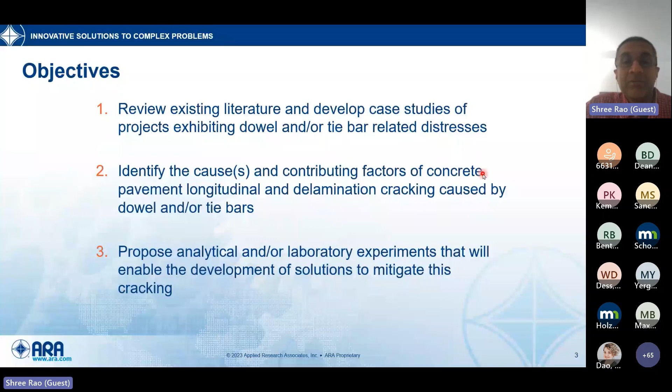This phase one of the project is really focused on some field evaluation and the background information necessary for phase two, which would be the analytical and laboratory experiments. That part is not covered in phase one, but would potentially be a phase two topic, eventually funded by NRRA.

As I mentioned, there are different tasks under this. We did a thorough literature review, picked some case studies, and in task two did field investigations, putting together a field investigation report and presentation. Task 8 is this Research Pays Off webinar we're doing right now. We're wrapping up a memo for the analytical and lab experiments that could be done in phase two, and we'll also put together a final report combining the information collected in all these different tasks. Those should all be coming in the next few months and posted eventually.

I'd like to acknowledge the panel for providing us some of the site locations. I won't spend a whole lot of time here, but we limited ourselves to 6 sites, many in Wisconsin, but also including the Illinois Tollway and Minnesota. One thing I'd like to point out is these are not necessarily thin pavements - they're 10, 12-inch pavements with differing slab widths and different types of shoulders. But I do want to point out these are relatively low age pavements. This cracking we investigated in this project was on pavements built not that long ago, and that's part of the big surprise of this type of cracking we're evaluating.

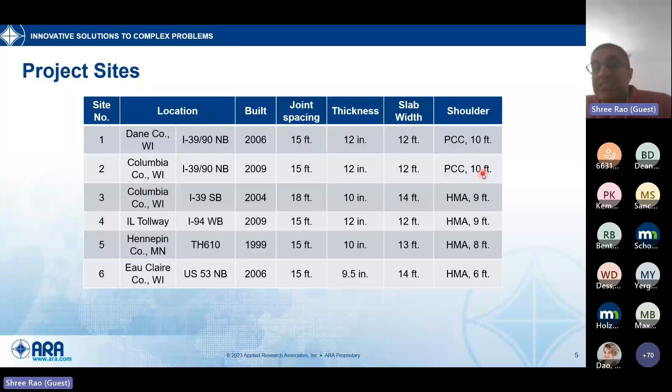So the next 6 slides, I just want to give some feel for this type of cracking that we investigated in this project. I'm going to go through these slides relatively quickly to show the surface distress of this cracking.

This particular one is on I-39 northbound in Dane County, Wisconsin, and you can see these cracks are pretty large cracks. At least from my experience looking at concrete pavements in the past, sometimes when we see a joint distress, we pretty much automatically think one of two things: dowel alignment, or durability issues because of moisture getting into the joints. But this looks a little different than some of those.

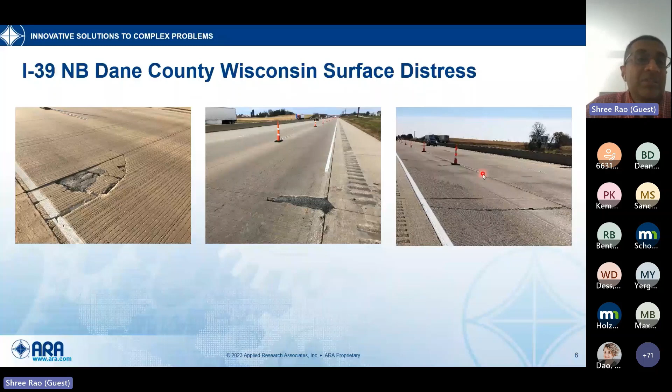So if you can see, these are kind of largish cracks, and some of them are more like transverse cracks that are close to the joint, and some of them are large spalls. As you can see, some of these have been filled with asphalt.

This one is in Columbia County. Again, there's kind of a pattern to these cracks. Eventually you start seeing the spalls, and the depth of these cracks is another important thing. Some of these are not super deep, they're about half the thickness of the slab typically, and some of that will become a little bit more obvious as I go through the presentation.

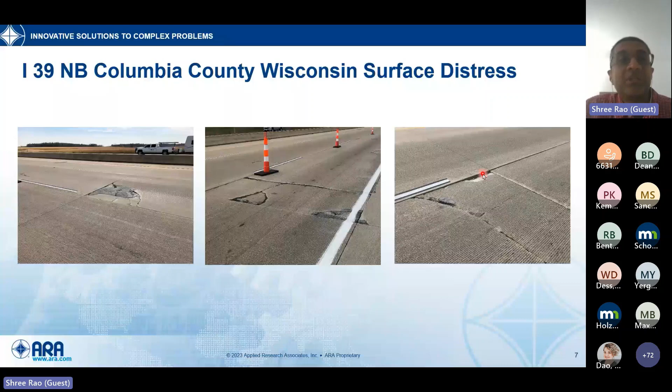The third one, this one is on I-39 southbound Columbia County, and you can see again, there's this typical pattern of cracking that is near a joint or something like this. And then the cracks might spread into wider areas, but this is kind of typical of this cracking.

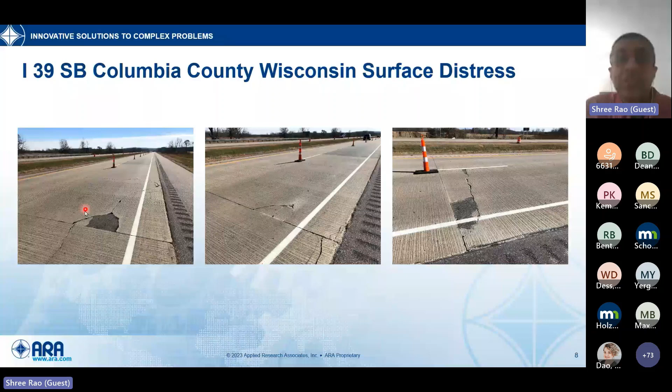This one was from the Illinois Tollway, and this, of course, is from a vehicle-mounted camera that you can see this distress. Again, this is right at the leave side of this joint, and you can see that crack has extended pretty much the full lane here. And the same thing here, this is about half the lane.

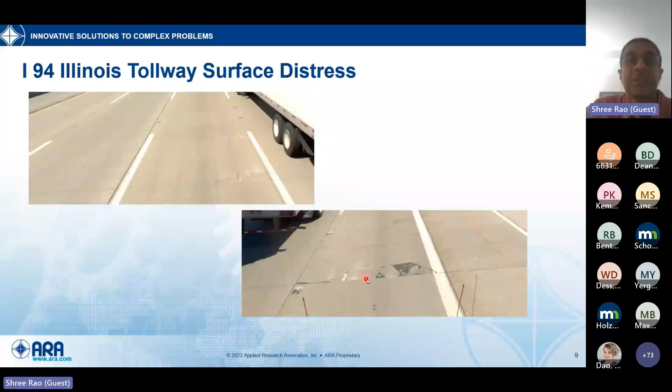Just to be clear, this kind of cracking is not necessarily just limited to Wisconsin, although Wisconsin does have much more of this cracking than Minnesota and Illinois. This particular one may have some durability distress as well, as you can see there, but it definitely extends in Minnesota here on this particular project on Trunk Highway 610, and looks a little bit similar to the cracking I just showed in the previous slide.

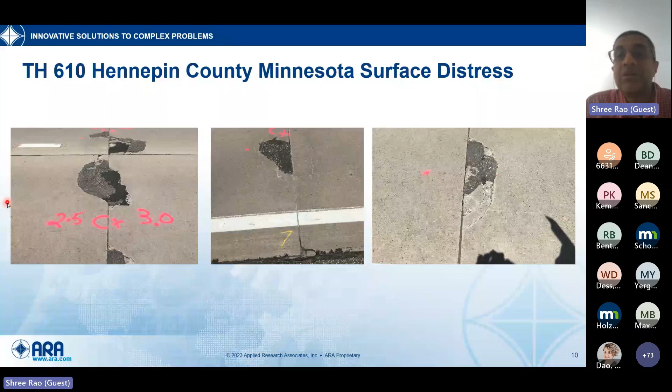And then this one is in Eau Claire County, Wisconsin. Again, these largish spalls that you can see here are pretty widespread on some parts, on some slabs. So that's just to give you an idea of some of these cracks that are near the joint, and they're potentially due to the dowel bar.

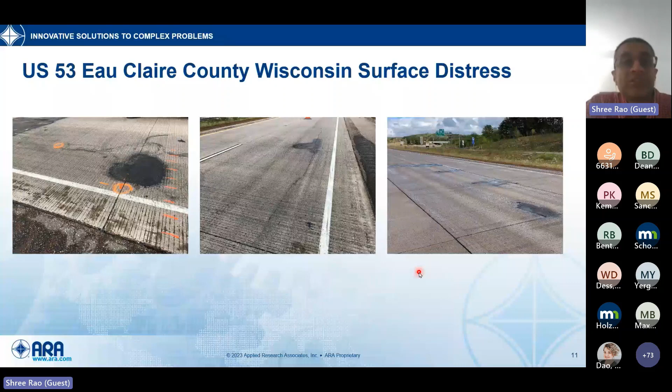But just to kind of summarize the surface distress and talk about what we are looking at, there are relatively large spalls at transverse joints. They're relatively common in occurrence, with about 5 to 10% of joints that we looked at having this cracking after only 10 to 15 years of age, which is relatively young to see that kind of cracking, 1 foot or more in length.

And I do want to emphasize that these don't look like durability related spalling. I know we do spend a lot of time talking about materials and durability of concrete, and there's a lot of good work that has been done in performance engineered mixtures and so on. But this doesn't look like durability cracking because of the extent and size of the cracks and their depth. Typically, the spalls are about half the depth of the concrete, and they lack any significant amount of hairline cracking. Often with durability type cracking, there's some hairline cracking around the spalled concrete as the aggregates break the concrete matrix. We don't see that here.

So basically this initial information suggests that they may be related to the presence of steel, which could be dowel bars and tie bars in the concrete.

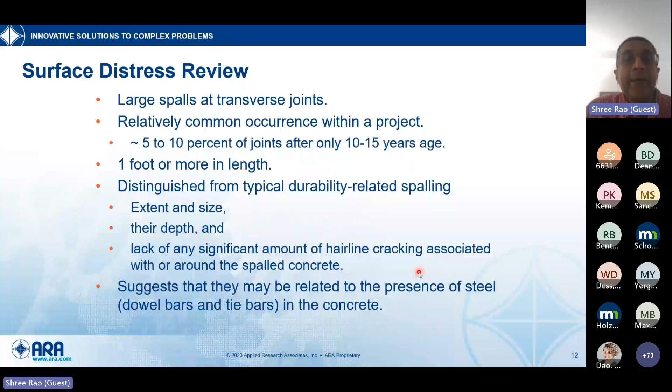These next 3 or 4 slides are from the Illinois Tollway. And what is interesting here is the progression of these spalls. This is taken from a downward facing camera on different joints, and there are 4 joints that I'll show. This is 2018, there's a very small spall here. This is the same joint, it's again small, and then in a year or two, it's now become a pretty large spall. So it does progress relatively quickly.

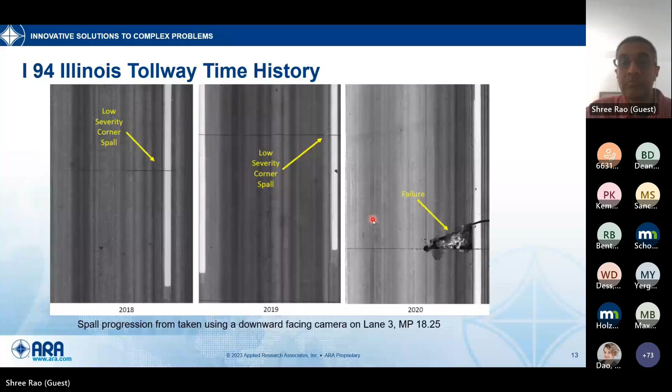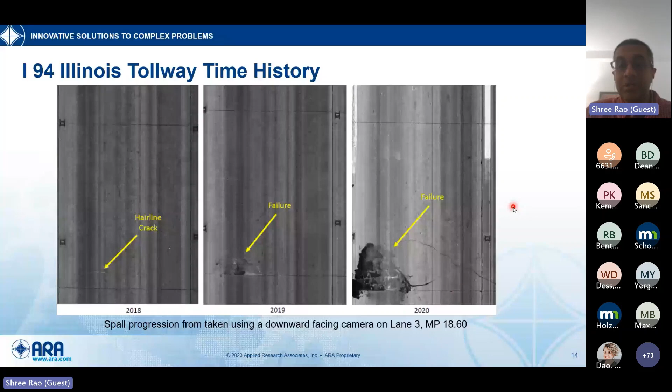Another example of that is 2018 was a hairline crack. 2019, that crack has now become a little bit of a spall, and then by 2020, which is about 3 years, it's a major spall. So it's not a small spall; it's extended quite a bit into the longitudinal direction and in the transverse direction.

And here's another example, these are different joints. 2018, nothing. 2019, we're starting to see a spall. 2020 is now a failure of the concrete.

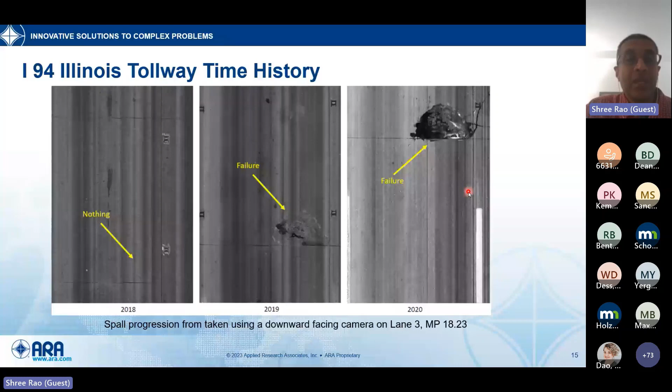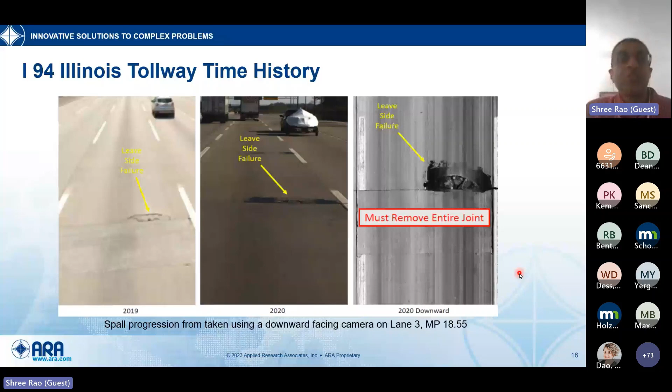And here's another one. Again, the spall is small here, and here there's a patch here on this side. So clearly there was a spall here before, and you can see that patch here and the patch here, and then on the leave side, it's getting extended. So just a quick review of this time history, at least based on these Illinois sections, is the spalls progress pretty rapidly from small to large, and they're not necessarily limited to the approach or leave side of the joint.

From the information we saw, they're just as likely to occur on the leave side of the joint as they are on the approach side of the joint.

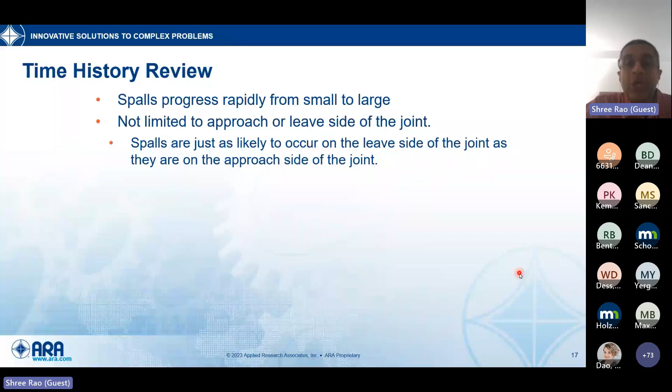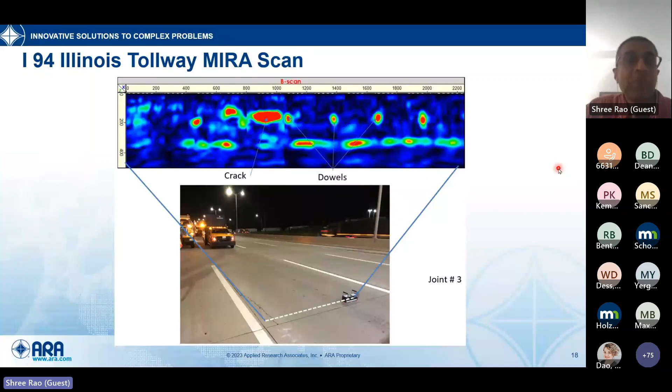The crack is now starting to form somewhere on here, and there's quite a bit of cracking at that dowel depth between somewhere in this range. You can see the cracks.

What is interesting here in this particular image is that there is no crack on the surface. This crack is all subsurface cracking. So it's almost like a cancer of the concrete. You cannot see it, but it's there. There's a crack underneath there.

Eventually, something is going to happen, and it will either show up as a distress on the top surface, or the crack might turn down and go into the base. Regardless, this concrete is not now fully usable, you cannot take full advantage of the full thickness of the concrete, because it's actually literally sliced into half, at least in some of these areas.

And here's, like I said, a 3D image, and we're calling this delamination cracking. This delamination is essentially at the dowel bar depth of this concrete.

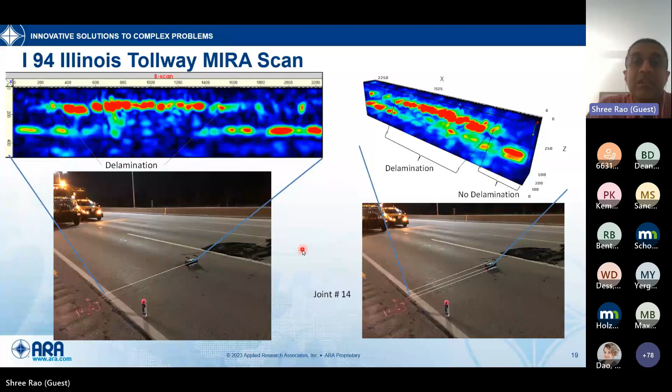Again, this is kind of interesting images to see, and this image shows both the approach side of the slab and the leave side of the slab. So you can see the adjacent lane has some cracking, which eventually turned into a spall, and you can see the patching here.

But there was no cracking on the surface on either side of this joint, but underneath it. Just to remind you, this circle gives us some idea of the dowel bar depth, and so you can see that there's a crack, and then there's the dimensions in millimeters. One thing I do want to say is that not all the measurements are right at the dowel bar depth, and that somewhat makes sense because the cracks eventually turn up or turn down. So depending on how the crack progresses through the concrete, it could be higher or lower than the dowel bar depth as you go away from the joint.

And you can see that in this case, there's not that much cracking here. These are the dowel bars, and then this half is cracked. What is interesting to me in this side is...

There's some amount of symmetry here, in the sense that there seems like there's cracking from here to here on both the approach and leave sides, and then less cracking from here to here on both the approach and leave sides. So there's a little bit of symmetry. Now, granted, there's some cracking here, and it's likely that some of this might eventually crack on this side as well.

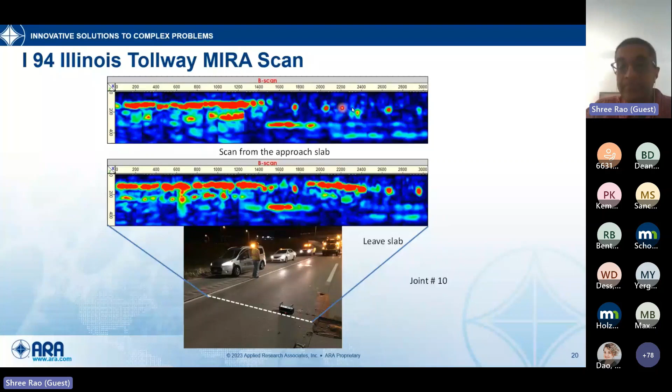Here's another image, and you can see there's a spall here, so clearly there was some kind of cracking. But on this side, we're now starting to see some subsurface cracking at that level. From here to here, there was no cracking at the dowel bar depth level, so there's some cracking at that point.

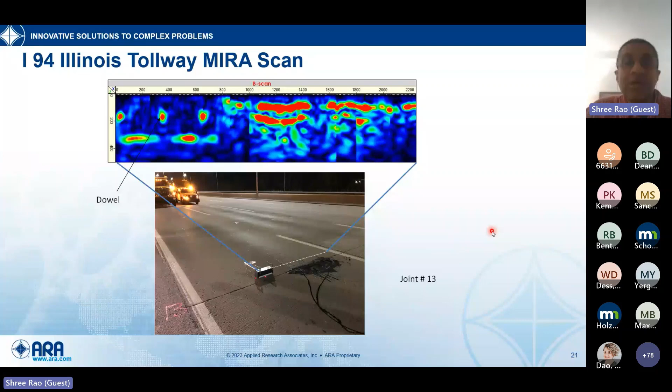Here's another example of that. Again, there's no cracking on the surface, but there is cracking underneath the surface around the depth of the dowel bar, as measured and seen with this MIRA scan.

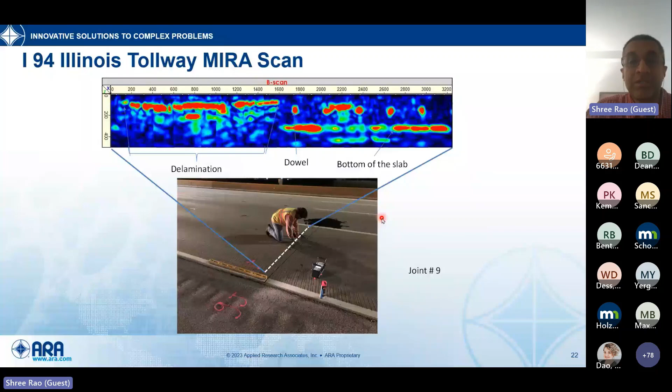And there is cracking in the adjacent lane that had been spalled off and patched with asphalt there. Here's another one, cracking on the leave side of this joint, and then no surface cracking on the approach side of this joint, but there is cracking, as we can see in this image, underneath. It just has not spalled yet.

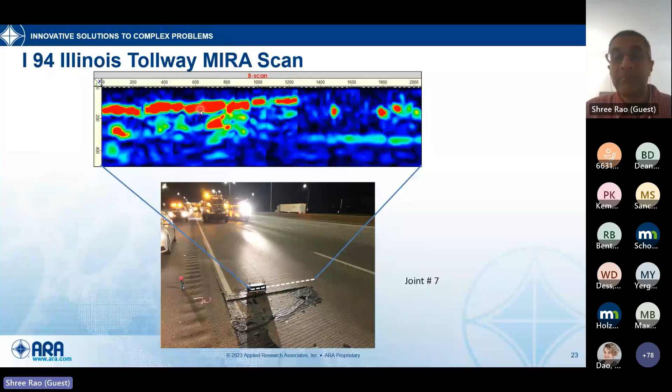And here there's an image of a spall that you can see, and of course that spall, because the concrete is damaged, or because there's asphalt there, that image is empty there. You can see there's a little bit of cracking underneath here and some cracking there.

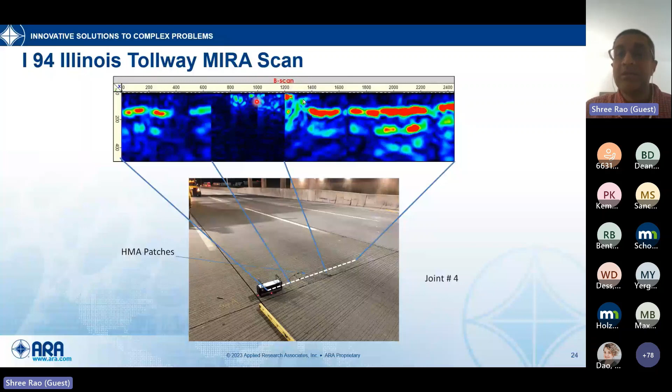Sometimes it doesn't spall to the surface. Sometimes it may just spall to the bottom of the slab and turn downwards, and you may never have a distress at the surface, but that could potentially lead to other structural distresses because you're not taking full advantage of the thickness of the concrete.

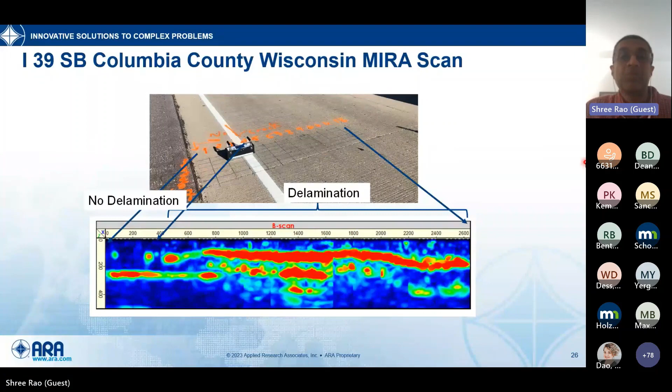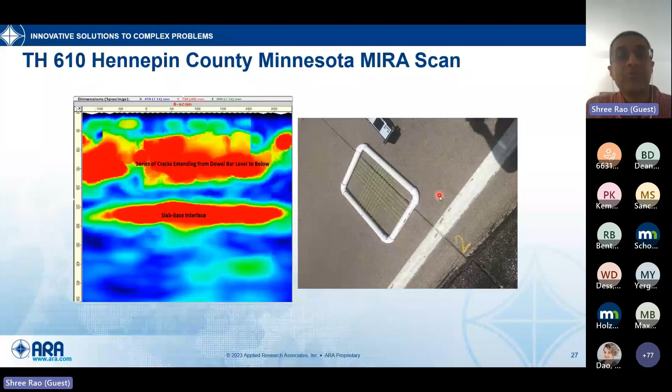So just a quick review of the information from the MIRA scans. There's a significant extent of delamination cracking beneath the surface that we may not necessarily see at the surface as a visible distress. Overall, it looks like they start around the depth of the dowel bars, extend through multiple dowel bars, and in some cases, the full length of the joint.

The cracking can be severe enough that the signals kind of overpower the signals from the slab-base interface, as I mentioned earlier. Both the approach side and leave side of the joints have this cracking. And as I mentioned earlier, there's a little bit of symmetry. I wouldn't hang my hat on that and say that is definitely true, but it seems like when there's some damage on the approach side, let's say to half a slab, there's some damage to the leave side to about the same half of the slab.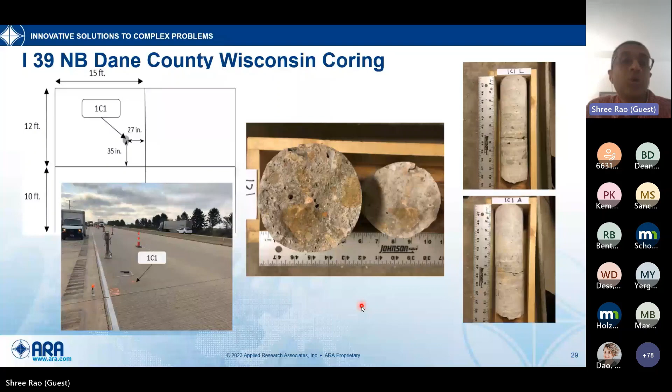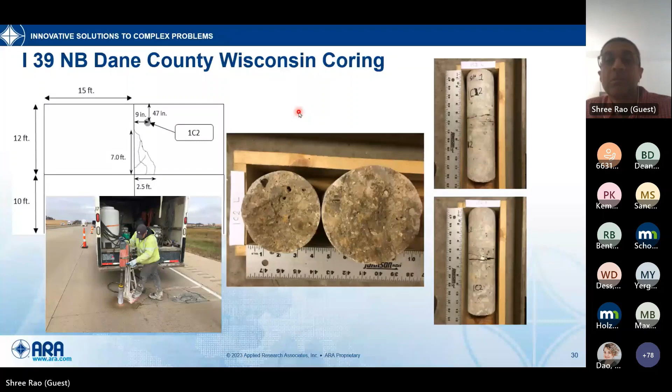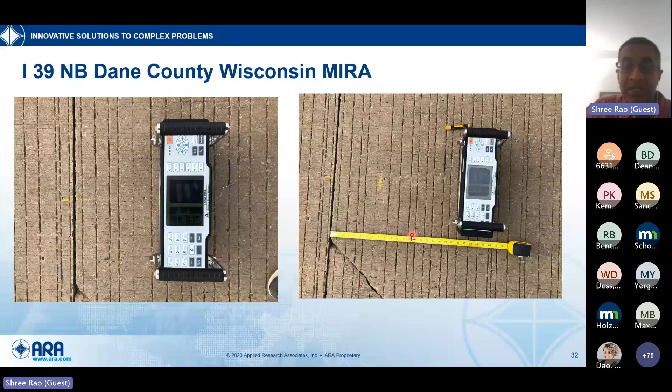That somewhat makes sense if you look at this particular how this joint spalled. It spalled quite a bit. The way I envision this mechanism, and maybe I'm wrong about this, but I think what is happening is these dowels are causing some weakness, and there's going to be a plane of failure, and then the cracks eventually spread, migrate in this direction, and this direction, and this direction. And then eventually they turn up or down, and that could be due to the traffic action and just the loading action on it. But it's a very interesting distress that is being shown in these slides.

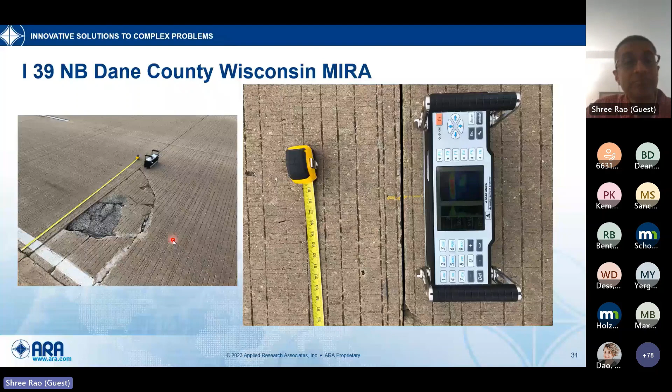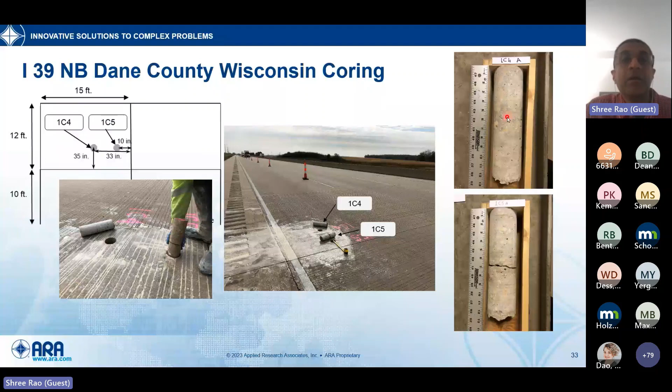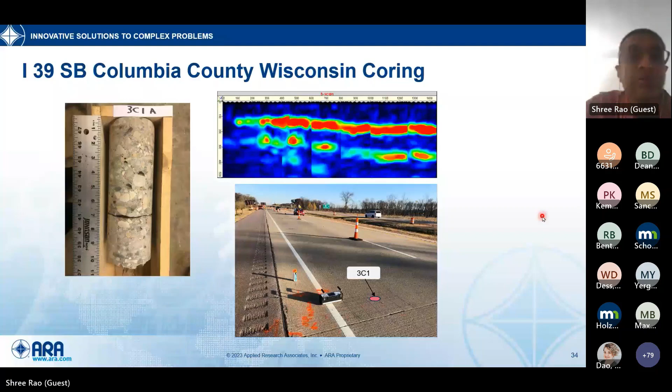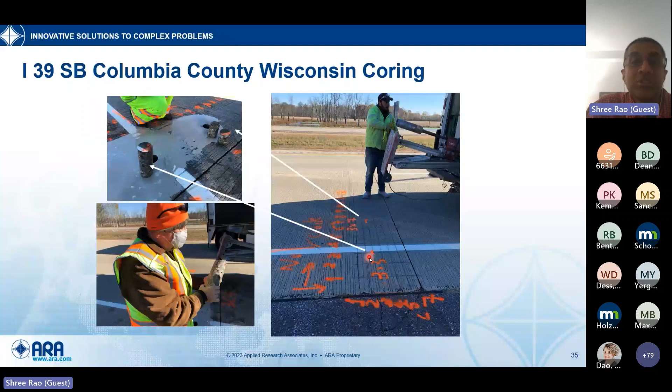This is again Columbia County, Wisconsin coring. This core here was intact, and you can see that full core, but this core here was basically broken into two pieces. So again, to me, it's hard to speculate about everything, but it could be that this is a widened lane, and it could be the traffic loading here in the wheel path may be partially responsible, at least for the crack propagating through here, and not really propagating or extending to this core. It's a little bit hard to know for sure what's going on. We saw this in some other places as well, similar.

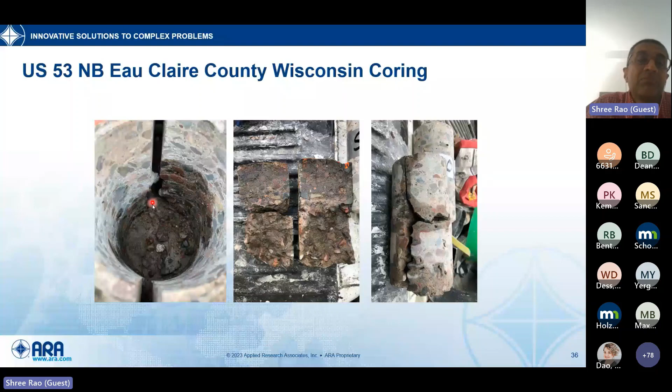And this is a core from Eau Claire County, again, roughly mid-depth of the core. In this case, it is cracked. Again, some of it is hard to tell, but we have lots of this kind of evidence from coring that these cracks are about mid-depth.

So just to kind of summarize the coring review, again, the report has more images, more discussions on some of this, but the cracks extend for several feet away from the transverse joint in the longitudinal direction. They extend beneath the concrete surface, even when there are no visible distresses on the surface. They seem to start around the mid-depth of the dowel bar, again, kind of confirming the coring and the MIRA scan kind of go hand in hand, and they confirm each other.

Eventually, the crack turns up or down. Cores taken closer to the joint generally have cracks at mid-depth, while cores taken 2 or more feet away show the delamination crack either at mid-depth or higher or lower than mid-depth. Cores typically show the crack progresses through the aggregate rather than around it, especially when the cores are away from the joint. But in some cases, cores closer to the joint had cracks go around the aggregate.

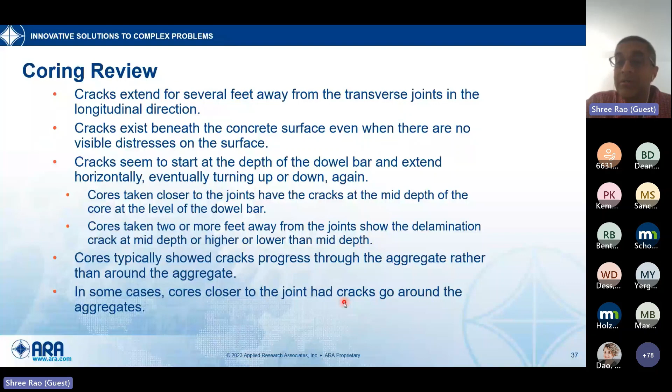Some people may think it could be due to dowel misalignment.

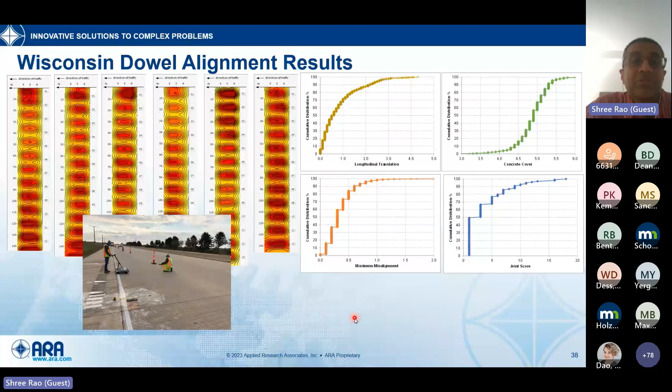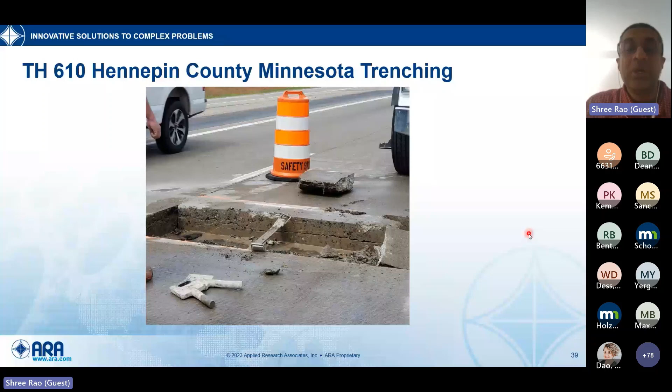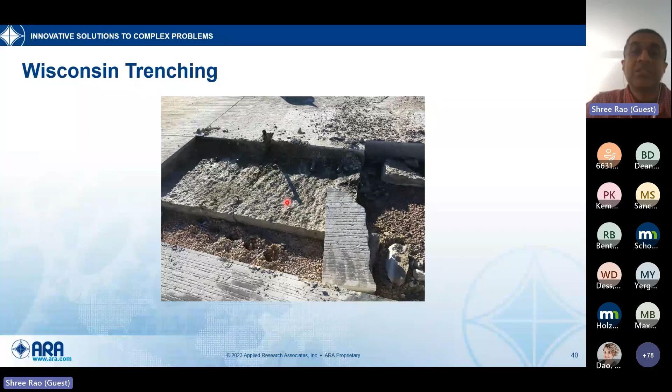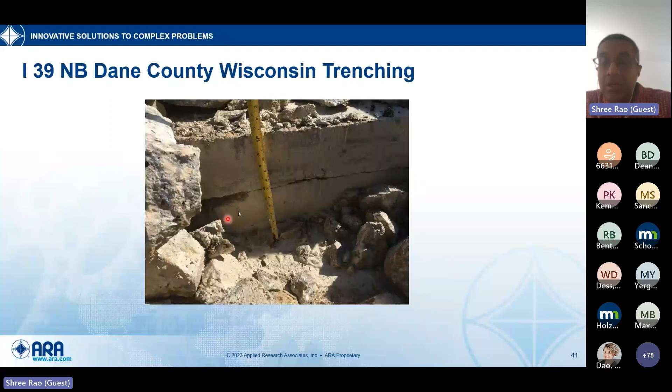We obtained some trenching photos and images from both Wisconsin and Minnesota. This one is from Minnesota - you can see the crack extends right about mid-depth and pretty much the full width of this transverse joint. This one is from a Wisconsin project. It's a little hard to make out, but this is the dowel depth, and the slab is essentially broken into 2 pieces. A better image of this is from I-39, Dane County, Wisconsin. This photo was provided by Wisconsin DOT, and you can see the pretty much uniform crack right about mid-depth of the dowel bar. So the trenching operations are consistent with the results from coring, MIRA scan.

We did do some GPR testing at the Illinois Tollway. It didn't give us that much useful information since it's a bit hard to interpret some GPR images, but it is consistent as well - the delamination crackings are at the depth of the dowel bars, consistent with all the other information we saw. One thing I wanted to point out is these are pretty uniform cracks, suggesting the delamination is caused by the combined action of multiple dowel bars acting in sync rather than 1 or 2 dowel bars. At the very least, this likely indicates a horizontal zone of weakness for the crack tip to propagate. That's the overall summary of the trenching.

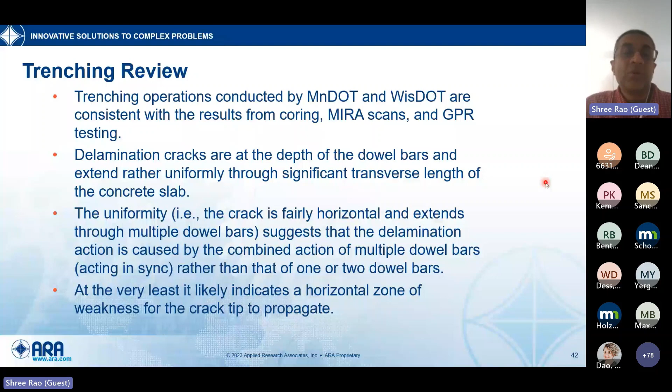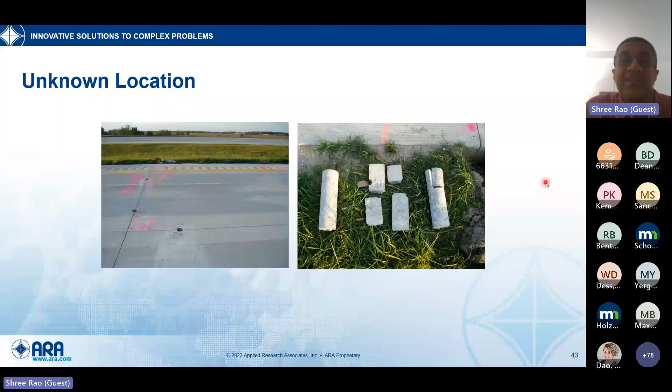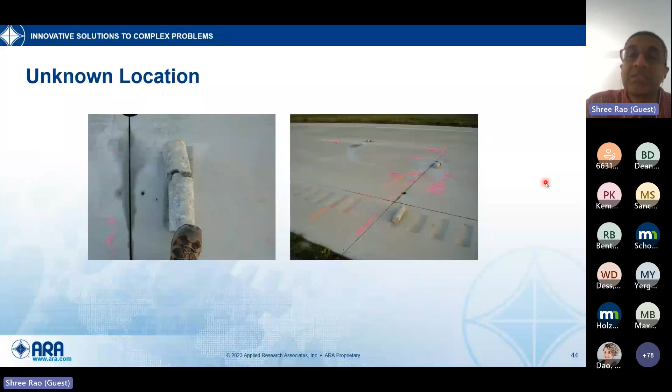Once I started this project, I went through some file photos I had from before, and I came across these images. I believe one of these is from US 24 in Ohio - I'm not sure which one. This phenomenon is not entirely limited to the upper Midwest - Wisconsin, Minnesota, Illinois - but it could even be Ohio. I've had conversations with folks in the concrete industry who may have seen this kind of cracking further east, in Pennsylvania and New Jersey as well. It's possible, though I can't say for sure, that sometimes we may look at this distress and think it's durability cracking, but in reality it's this type of delamination cracking.

Now I'm going to wrap up my presentation with a few other items and talk about some potential mechanisms for this cracking. I came across this 1938 reference from Friberg. Several of you may know he did a lot of work on dowels, and the Friberg analysis you may have heard of in terms of how to incorporate dowels into your design procedure. But his lab experiments had something very similar to what we're seeing here. This is a direct quote from Friberg from 1938: the initial visible distress of the concrete comes a considerable time before the ultimate load is reached.

The initial warning almost always consisted of a small spalling underneath the dowel, first noticeable as a fan-shaped crack from 0.5 inch to 1.5 inch away from the dowel. In the deeper specimens, the first evidence would be a very small horizontal crack extending from the dowel toward each side, merging into a fan-shaped failure as the load increased.

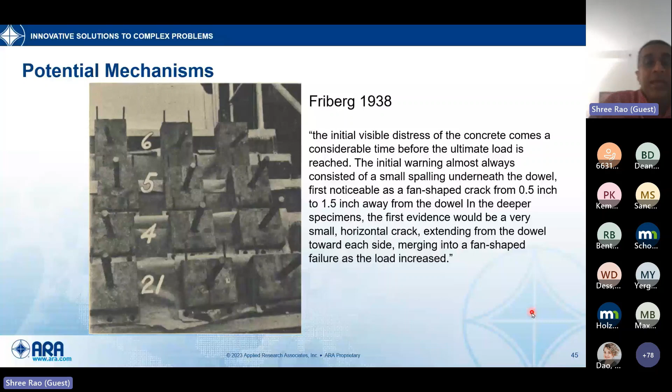So it looked like Friberg in his lab experiments saw something very similar to some of the items that we are seeing in the field on some of these test sections. There's a couple of other references that kind of talk about this mechanism - Rasmussen from Transtec and Mackiewicz - and especially Rasmussen, you can see that they talked about this, and I totally agree that this is probably the main likely mechanism by which this crack is happening.

You have some curling of a slab, and then that is causing some weak zones under strain by the dowel bar. The weight of the slab also may play a factor in that, and then you have these stresses, and eventually the stresses result in some cracking, which then extends due to traffic load action, and either shows up as a spall, or a crack, or may not entirely show up, and it may just be a crack that's subsurface.

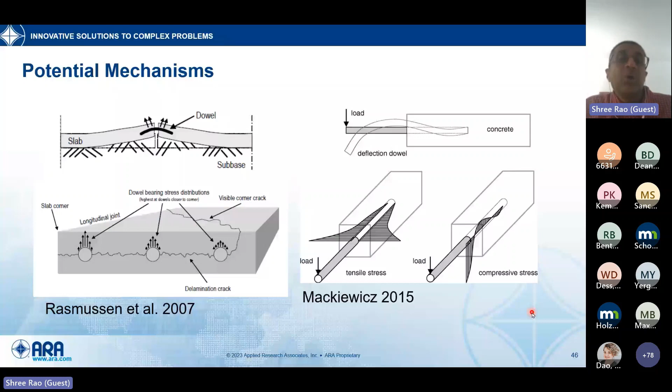So again, this is a potential mechanism, and I think our best guess in terms of the mechanism for this cracking, at least from the phase 1 evaluation, is something like this. In the early ages, when concrete is just starting to gain strength and it's solidified, but it's very low strength concrete.

The strengths are pretty low, and during this time, the concrete is vulnerable to high stress concentrations around dowel bars, and that may explain a little bit of why a lot of this is in northern Illinois / Wisconsin.

It could be the construction time. I think maybe Wisconsin, Minnesota, maybe Illinois have that significant swing in daytime and nighttime temperatures, especially in the fall and spring, and that significant swing in the daytime, nighttime temperatures probably is less common in some other parts of the country, and maybe it doesn't happen all the time, but that could be a reason why it's a little bit more concentrated in this area.

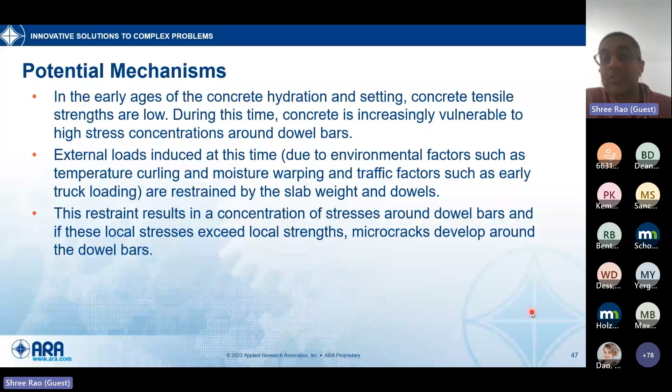So then there's external loads due to these environmental factors like curling and warping, and there may be even some traffic contribution, such as early truck loading, and these loads may be restrained by the slab weight and dowels, and this restraint results in some stresses around the dowel bars, and the concrete may not be strong enough in this early age to handle these stresses. So if these stresses exceed the local strengths, then you may have some micro cracks around the dowel bars.

Eventually these - we don't see this right away. So the concrete now has gained sufficient strength, and the stresses are now lower than the strength. So the concrete looks okay, but then these micro cracks, due to traffic loading over years, kind of continue to deteriorate, and there may be some moisture impacts as well here, entering the joints and so on.

And then due to the impact of the daily traffic loads and curling warping of the slabs, the daily moisture - everybody who's involved in concrete pavements is somewhat aware of the impact of loads and curling and warping on stresses in concrete, so they certainly probably exacerbate this situation. So eventually these micro cracks kind of coalesce to form cracks, and then they propagate horizontally and then turn upward and appear at the surface of the slab as a large spall. I think that's kind of what we're thinking is the mechanism for that.

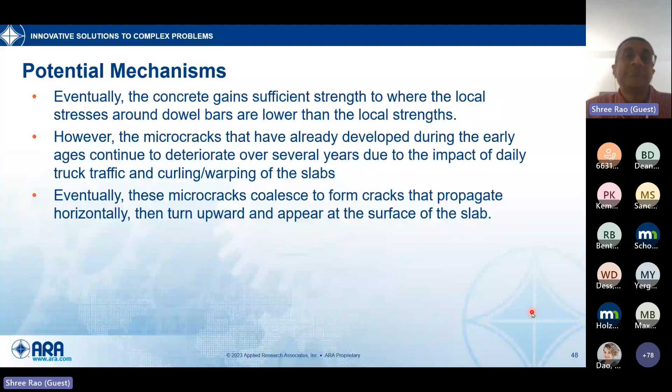Obviously the factors that relate to this are concrete properties, how the strength gain happens, the modulus and early age factors during and immediately following construction, temperature fluctuations, the difference between daytime and nighttime temperatures, which depends on the construction time of the year - and that difference is highest during early spring and late fall. Curing may play a role in this.

Of course, the dowel bar properties - the size, stiffness, friction between dowel bars and concrete - and then even slab-base friction probably has a factor in here, because if you have a significant amount of slab-base friction, then the concrete may not move as much if you have higher friction, and that may be beneficial as well.

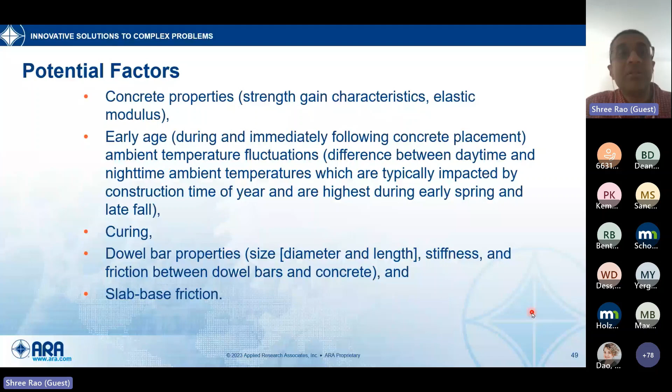So some potential solutions - again, this is kind of very preliminary based on the limitations of this specific phase 1 study - but look at the cold weather practices and see if you can reduce the likelihood of concrete placement where there is a potential for substantial temperature changes between daytime and nighttime temperature.

Now, the dowel bars, again, I'm not sure how far you can go with this - that requires some analytical and lab testing. You could potentially try using some less stiff dowel bars, reducing friction maybe by making sure or specifying.

There was no way for us to do a postmortem on how properly dowel bars are lubricated and so on, but it could potentially play a factor in this cracking. Curing could play a factor too, making sure satisfactory temperature and moisture conditions during early ages of setting and strength gain are adequate.

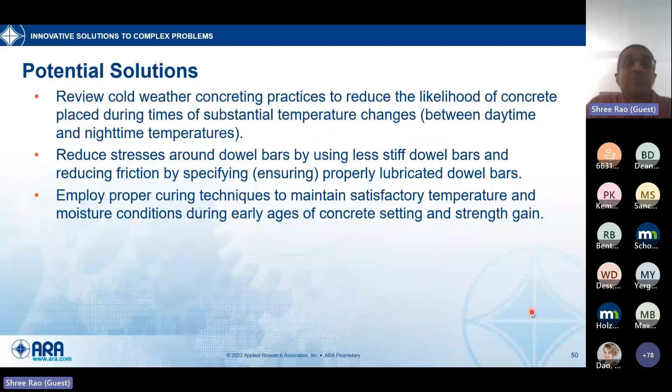This concrete strength is kind of a strange one. Strength is always important for concrete because it allows the concrete to handle stress. However, sometimes higher strength concrete may mean less durable concrete, so you want to make sure you have durability. I'm not saying sacrifice durability, so optimizing gradation and things needed for durability is very important. But within that framework of good, durable concrete, if you can get some higher strength concrete, it'll likely better handle stresses, but definitely not saying sacrifice durability.

That's what I mean. However, there's a limit to how much strength can be increased. Higher concrete strength could be specified if and only if it meets all the specified durability requirements in a cost-effective manner. I mentioned the base friction.

A stabilized base course would increase the friction, and that could reduce thermal movements and stresses in the concrete around dowel bars. And the same thing with coefficient of thermal expansion, CTE. Lower CTE will result in less thermal movement, but it's hard to specify that because if you have a certain location for a project, shipping, if you are limited to certain types of aggregates, it's a little bit harder to specify CTE. That may play a factor in some of this, but it may not be a practical, cost-effective option either.

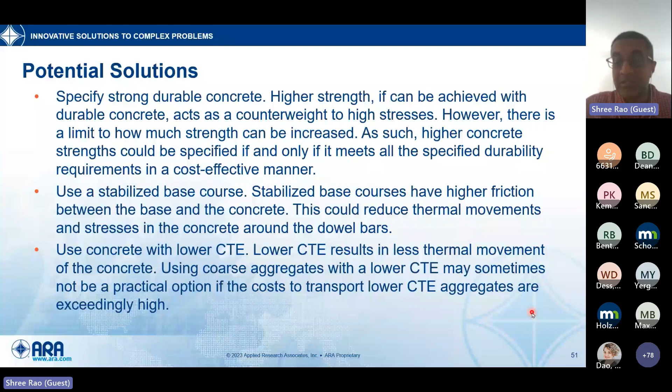So a couple of slides. For phase 2, we're putting together some potential things that can be done for lab testing, just to find out what these factors are and their relative contribution to cracking. The testing matrix could include concrete mixtures, thicknesses, and curing condition, though curing is a little bit harder to replicate in the lab.

Dowel and tie bar types, simulated curling and warping by changing support conditions. In the end, it's not the curling warping itself that is causing the problem, it really is just the stresses that are caused by that. And if you can replicate the stresses in the lab in a different manner, that basically does the same thing.

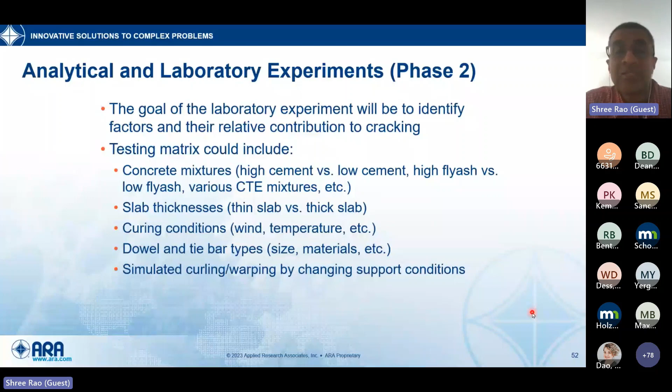Instead of spending a whole lot of money doing lab testing, you could certainly do some finite element analytical modeling to evaluate the stresses around dowel bars and identify the factors, so you can reduce your lab testing and come up with parameters to evaluate in the lab based on the analytical modeling. That's the last part of this project, where we'll come up with potential things that could be done in phase 2 to evaluate and further refine the mechanism and the factors that contribute to this cracking.